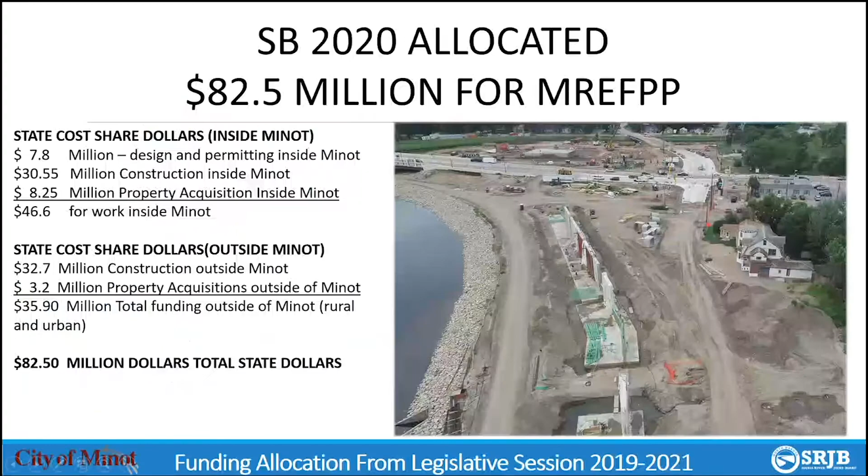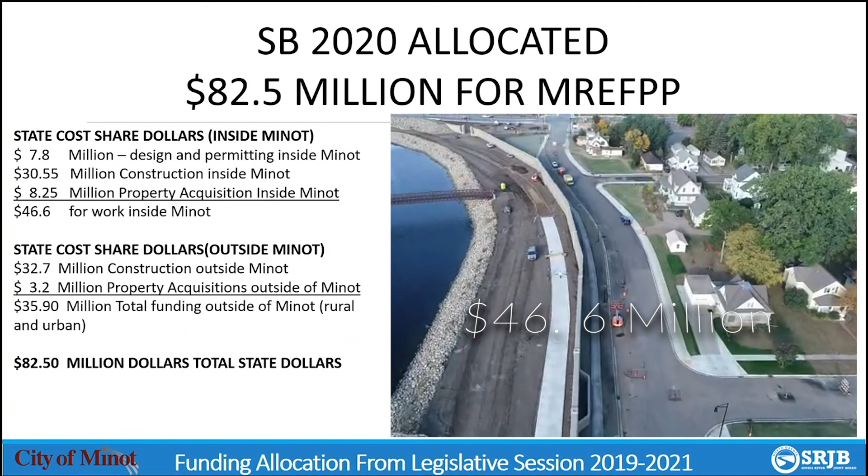This is a presentation to the annual Joint Water Convention and the Irrigation Workshop on the Mouse River Plan in the Mouse River Basin in Minot and throughout the rural reaches. So Senate Bill 2020 and the 2019-21 biennium allocated $82.5 million for the Mouse River Enhanced Flood Protection Project. Of that $82.5 million, $46.6 million was designated for work inside of the Minot city limits, and $35.9 million for reaches outside of Minot for Burlington, Velva, Sawyer, and other areas in the Mouse River Basin.

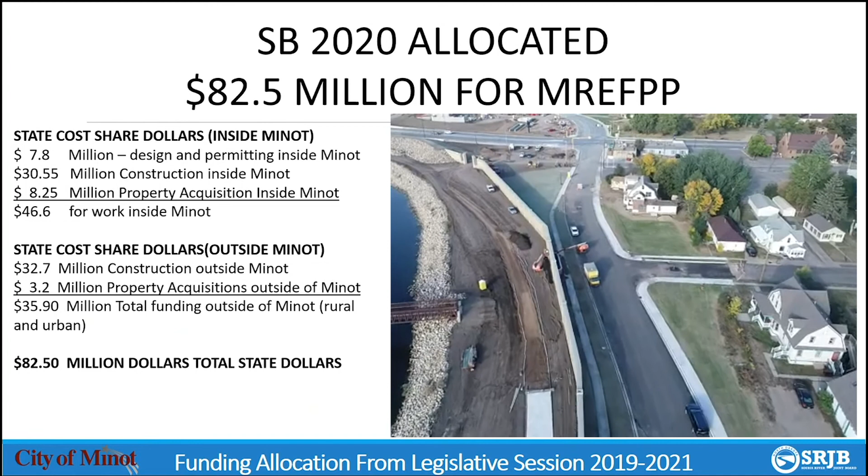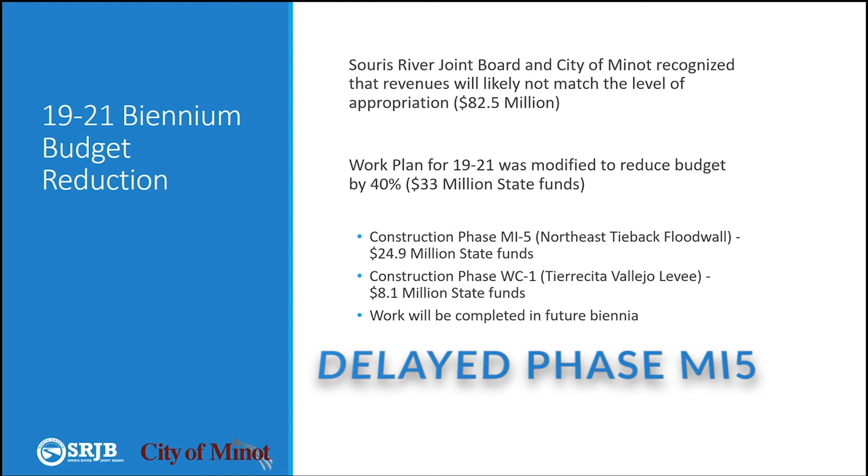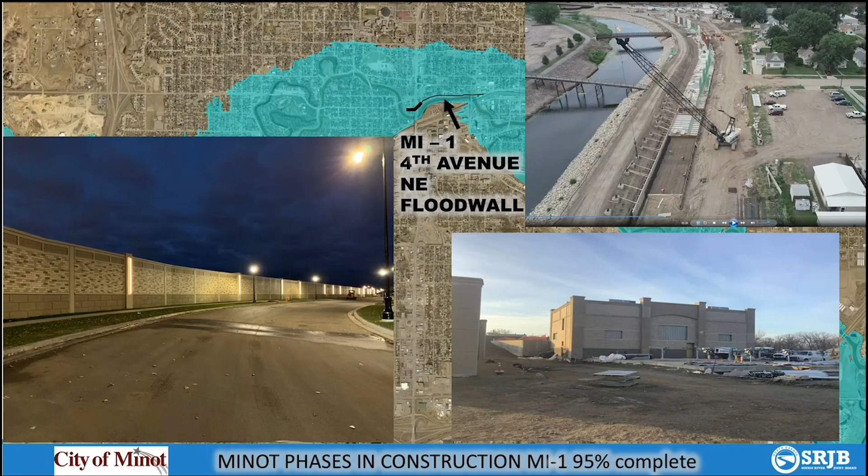The Water Topics Committee saw the shortfall in revenues into the Resources Trust Fund and asked us to come up with a 40% reduction, and we reduced our budget by 40%, or $33 million. This consisted of delaying one of our phases, MI5, and also WC1, which is the Tierrecita Vallejo portion of the project, into the next biennium.

An update on the current projects: MI1, which is the 4th Avenue flood wall, is about 3,000 feet of flood walls, a 190,000 gallon per minute stormwater pump station, and utility and street relocation. That project is 95% complete and is scheduled to be 100% complete in June of 2021.

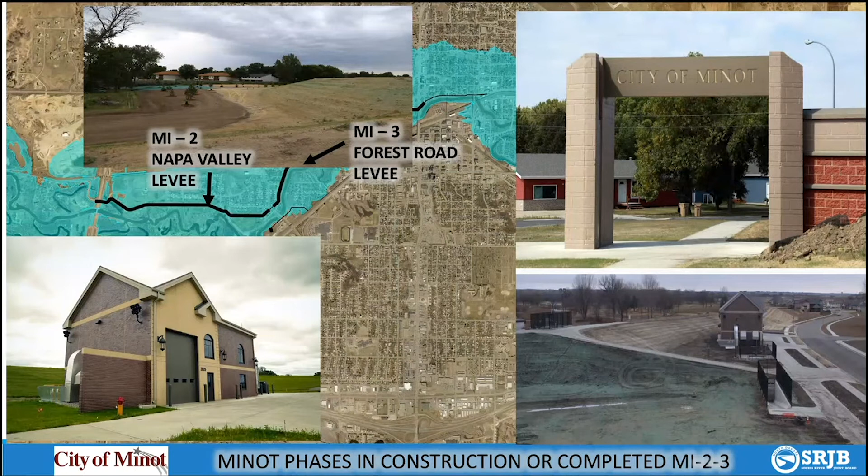MI2, which is the Napa Valley Levee and Forest Road Levee project, consists of about 9,000 feet of levees, 2 stormwater pump stations, a transportation closure, and a vast amount of armoring on the river channel. About a $35 million project, and that project was completed in September of 2020.

MI1 through MI5 and WC1. These projects are the projects that make up the legislative intent of Senate Bill 2020, which consists of $193 million to complete these phases of the Mouse River Enhanced Flood Protection Project. Once these phases are completed, it will remove approximately 60% of our residents in Minot from the new FEMA floodplain.

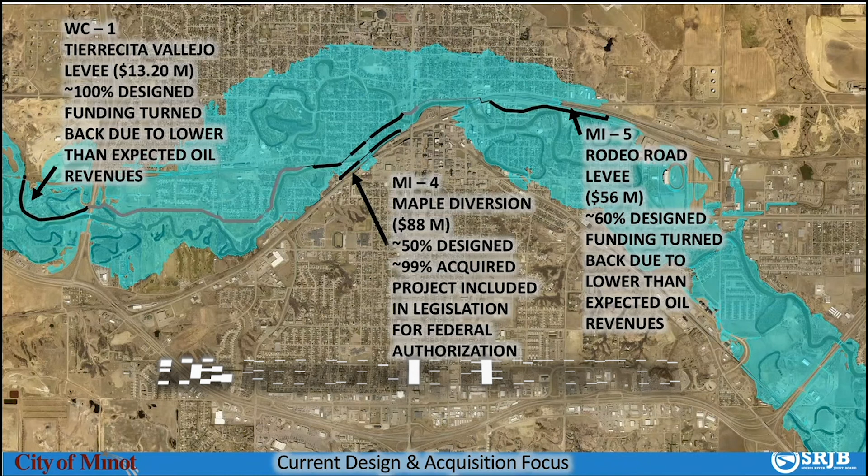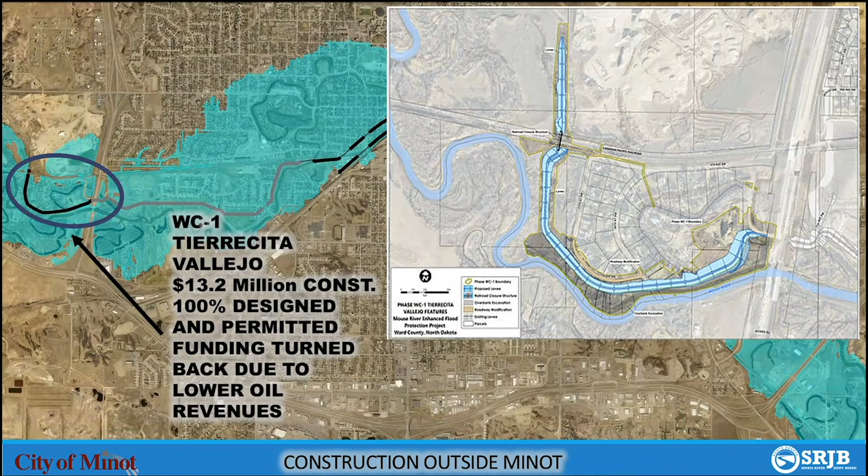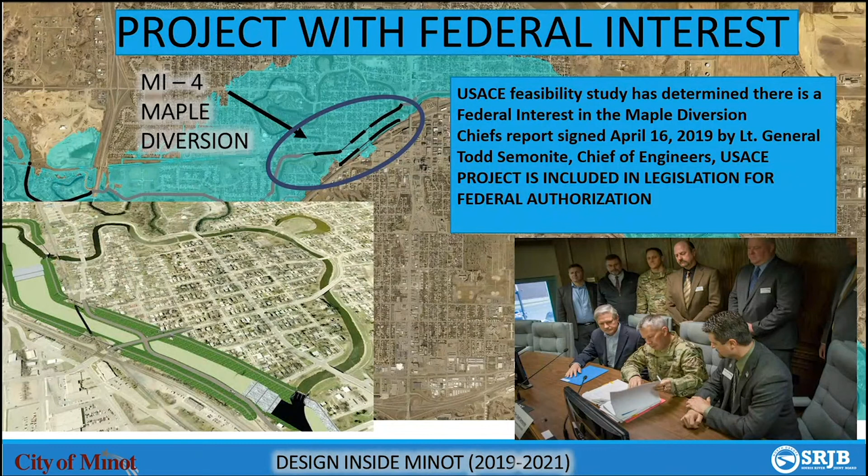WC1, Tierrecita Vallejo, is one of the projects that was delayed due to the reduction in funding, about a $13 million project. It is all designed, permitted, and ready to go as soon as funding is allocated, hopefully in the 2021 biennium. MI4 is our Maple Diversion Project, a high flow bypass diversion. This is a portion of our project that has a federal interest, now included in the latest legislation for federal authorization.

Phase MI5 on the east end of Minot. This project was redesigned since the funding was turned back, and we couldn't come to an agreement with Burlington Northern Railroad to cross their railroad. This project is about a $56 million project, about 60% designed, and will be ready for bidding in early 2021, pending funding approval from the legislature.

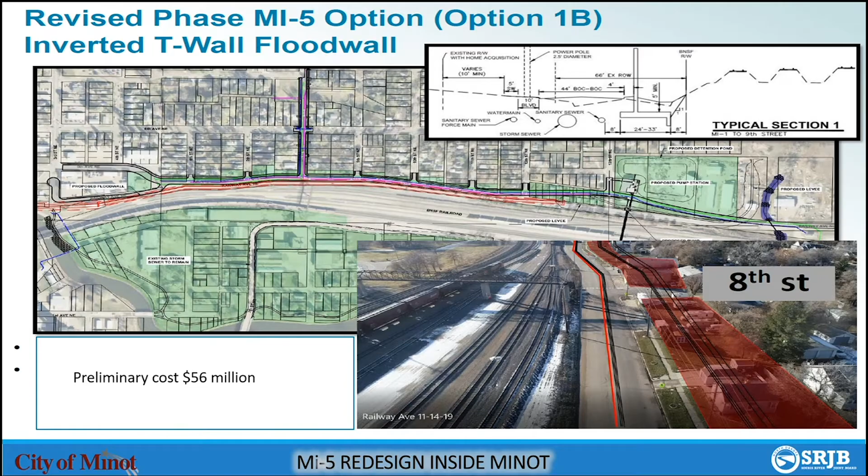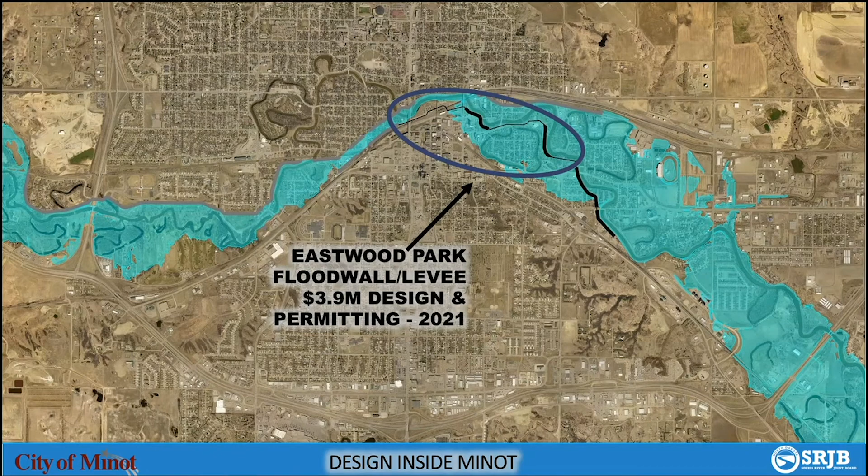Eastwood Park Floodwall Levee is the next portion of the flood control in the city of Minot we'll be starting on. It's flood control on the south side of the river. We're starting design and permitting in early 2021, and it will be ready for construction as soon as we have funding appropriated for this.

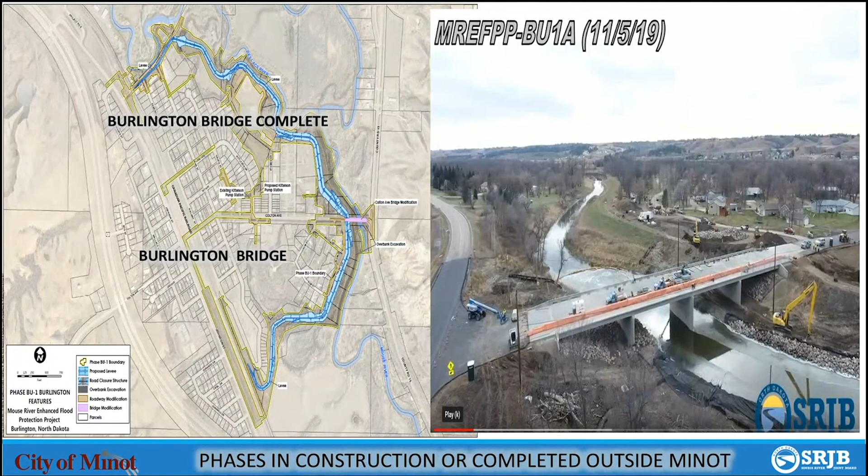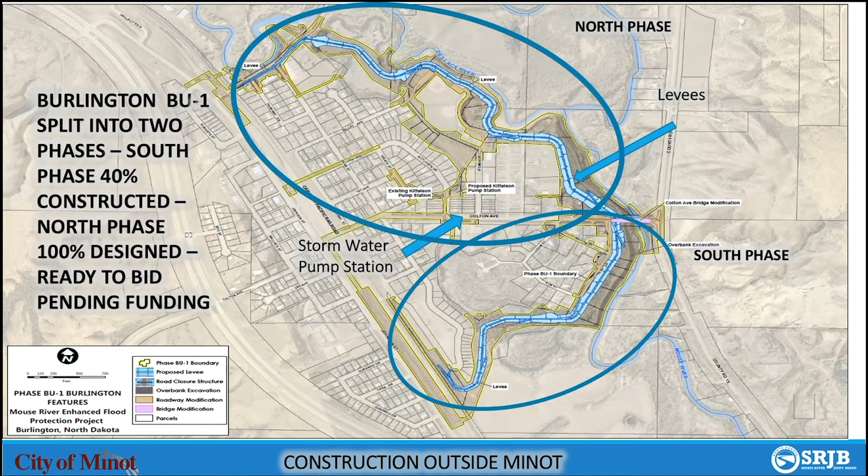Outside of the city limits of Minot, we're also continuing with flood control and flood risk reduction. The Burlington Bridge project was completed this year. It raised the bridge and added additional conveyance underneath the bridge for the Mouse River. The Burlington project was split into 2 projects. It initially was one large project, but due to funding and some acquisition issues, it was broken out into 2 projects. The south phase is currently under construction. It's about 40% constructed and will be finished up in 2021. The north phase will be ready for bidding in early 2021.

Outside of Minot, in additional areas of the Mouse River Valley, the Mouse River Park Bridge design is about 90% complete. That will raise that bridge and add additional conveyance for that area. Velva Bridge is also about 90% design complete. That also raises the bridge and adds additional conveyance, as well as the Sawyer Bridge, which is about 90% complete. These projects will be ready to start construction and bidding as soon as funding is allocated for them.

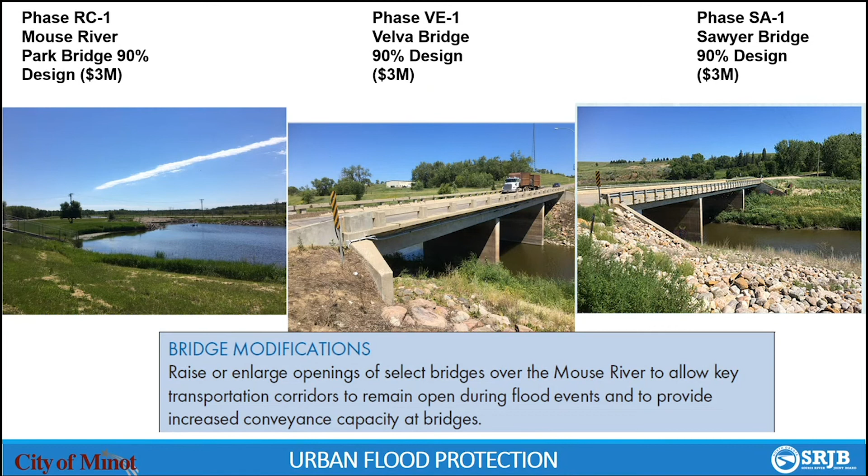The final item is our STAR program, which is our structure acquisition, relocation, and ring dike program for the rural reaches. It consisted of one ring dike that was constructed around one of the rural residents, relocation of 3 participants, 166 structures that were acquired, 131 demolished, and 27 structures resold. There's a total of 35 participants in this program, and about $10.4 million spent on the STAR program to date. We are looking at closing out this portion of the project as we have no other participants ready to participate in this at any time.